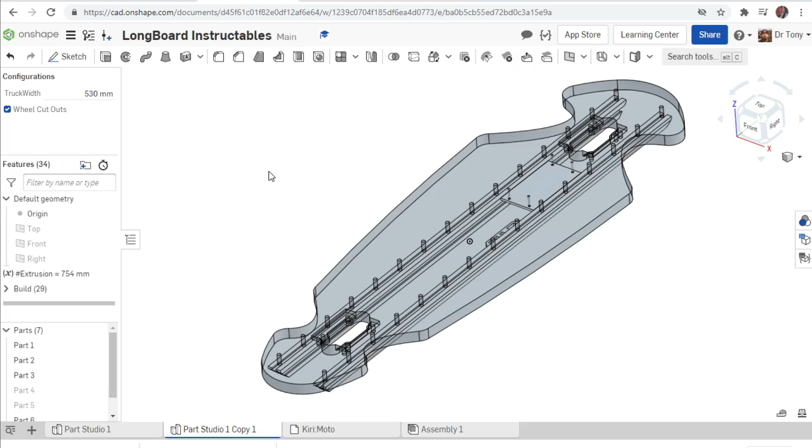In this video, I'm going to show you how to either laser cut this or mill this out. So first thing we have to do is actually pick out an actual pattern that we want to cut, right? So this one's at 530 right now. The one I built is 800. Okay, 800 is a little longer, kind of extra long. An average size might be like 650. Okay, that's gonna actually look like a regular longboard here.

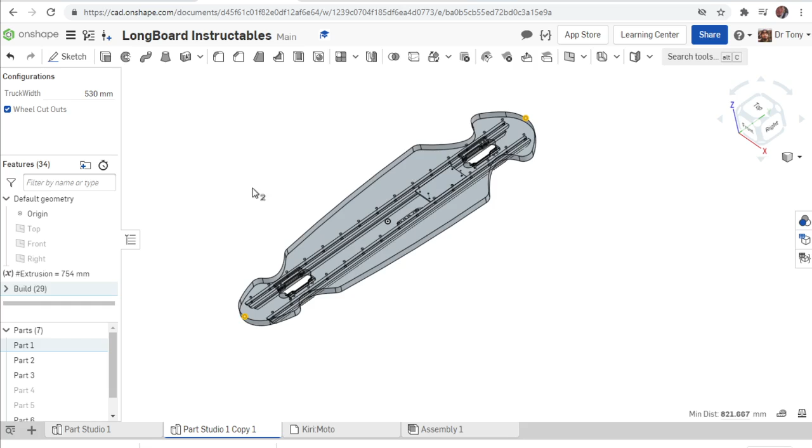Now I chose 530 because it fits on the Shapeoko 3XL, kind of a popular CNC milling machine. So if I were to click this point to this point, it's 821 millimeters. Okay, so the Shapeoko is 33 inches, which is 838 millimeters. So it will just barely fit on that. It'll fit just fine. It'll just have a little bit of extra room there. Okay, so we're going to take this 530 and show you how to play with that.

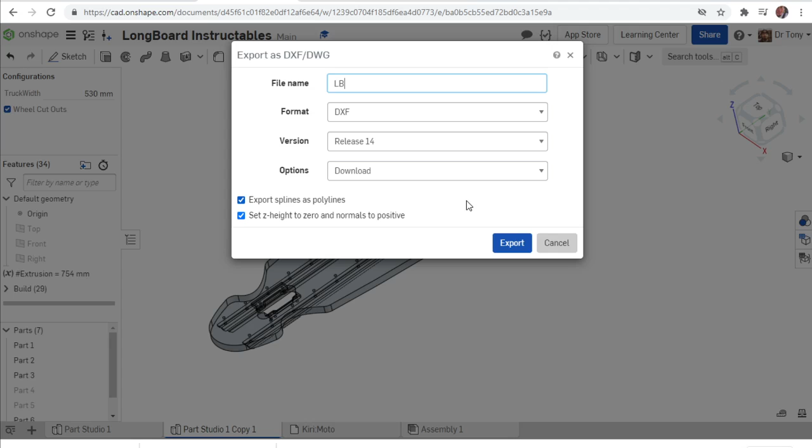So what I can do here is I can either take this to the laser or I can take it to the mill. So I'm going to start with the laser here. So I'm going to right click, export as a DXF, right? And then I'll call it LB 530 with cutouts. So that means it's a longboard, 530 millimeters, and it's got the cutout options. Okay. So then I can go over to Lightburn here, or whatever laser program you have, and bring that DXF in there. So here's a DXF,

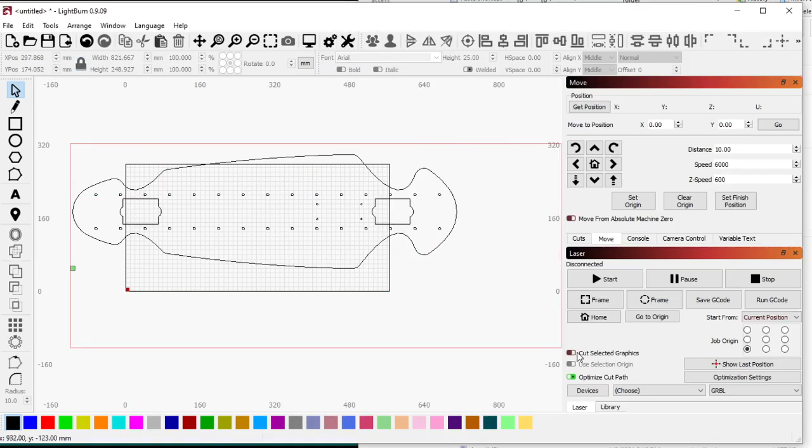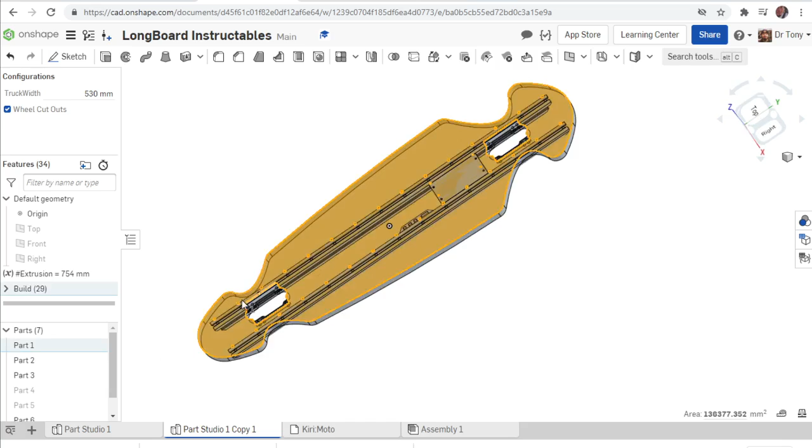and there we go. Now there's something wrong with this right here. Okay. So this one doesn't have the wheel mounts for this. So I'll show you how to fix that real fast here. That's my bad, actually. So delete this. Let's go back to our design here. So up top, this is the surface we're cutting out, right? Which is missing all this stuff in here. But if you pull from the bottom, right click, export as DXF. So LB 530 with cutouts for wheels. Okay. Call that good.

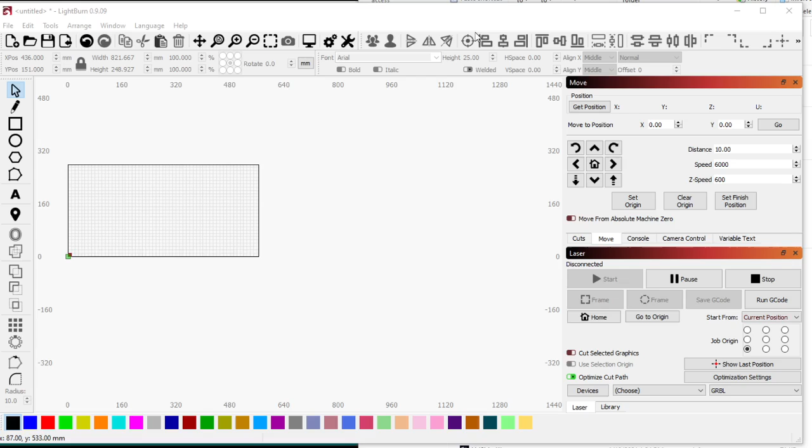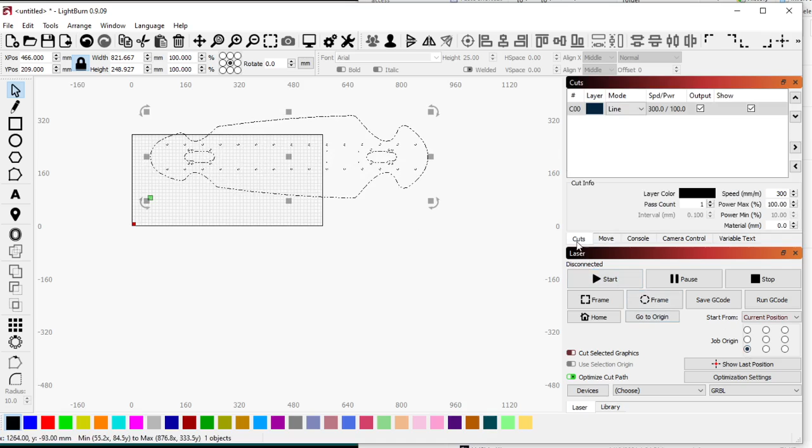And then we're going to go back to Lightburn here, open up our downloads, and drag that in. All right. Now we got wheel mounts or truck mounts. Okay. So with that, now we just line it up. Okay, I'm going to group this together. Let's see, cut from the bottom here. Let's go to our cuts. So I can either cut this out of wood or acrylic on my laser and call it good.

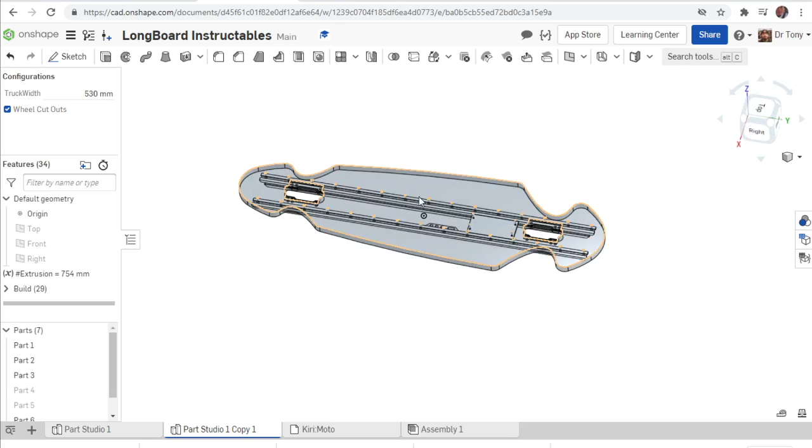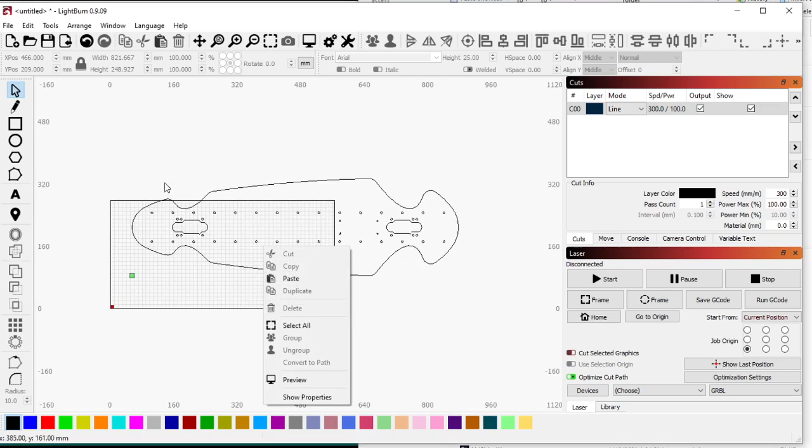I could also cut it out of a cheap wood and follow it with a router bit. Like, I can cut this out of 1/8 inch birch. And then screw it in with these holes. I could screw it into a piece of polycarbonate, piece of thick wood, whatever, and then use one of these reverse bearing tools and just follow it with a router, route it out manually. Or I could just laser cut it out of thick acrylic or thick wood and start mounting things. Okay, so that's the laser process, right?

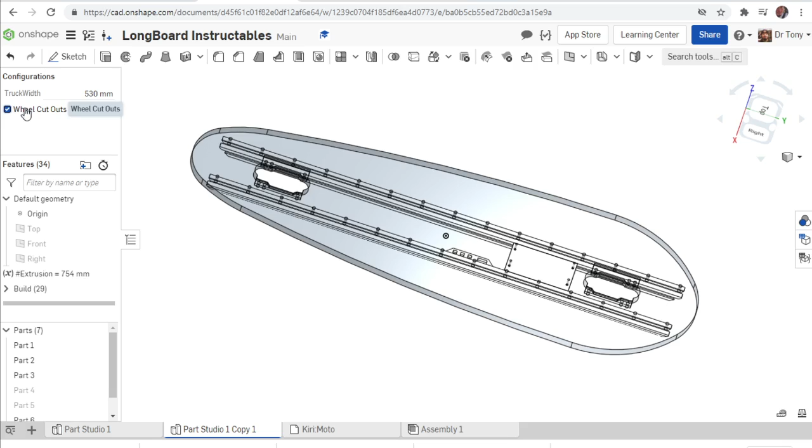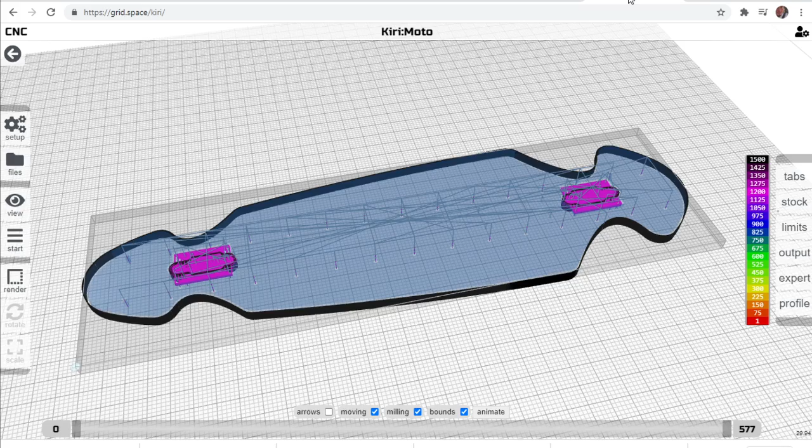The other way to make this thing is to mill it out on a CNC mill. Okay, so how to do that is, you get your size, you get your cutouts or not, if you want cutouts or no cutouts. I'm going to right click and just hit export. Not export as DXF, just plain export. And I'll call this LB 350 with cutouts. I guess it's 530. My bad. Sticking to it. Okay, then we go to Kiri:Moto here. Oh, I guess I already did this. Let's go to arrange. Delete this.

Okay. So, one of the coolest websites out there, you go to grid.space/kiri. You don't need an account. You don't need to have ever used it or signed up for it at all. And it might take a little while to load the first time, so be patient with it. What we're going to do is we're not going to be lasering, we're not going to be 3D printing, we're not going to be resin printing. We're going to be CNC milling. So I'm going to click on the CNC here.

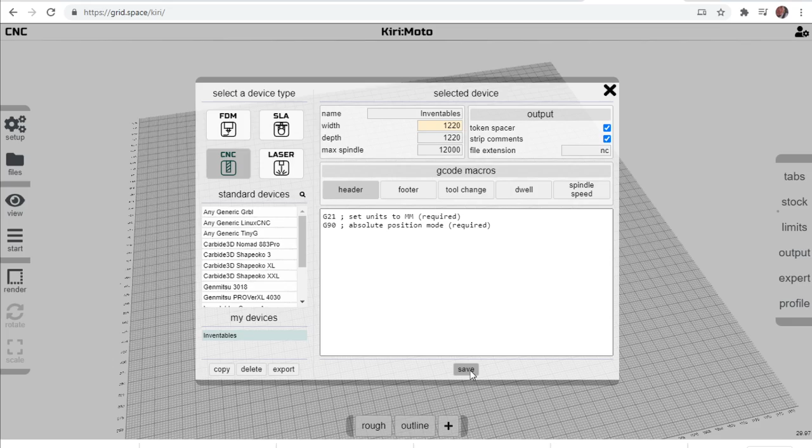Now you might have one of these CNCs already. The one we have downstairs, this is the size for it, so I'm going to leave it here and hit save. Okay, one more thing I'm going to add. So tools. I have a 3/16 inch tool. So I called it my end mill 3/16. The type is an end, right? You give it a tool number if you want.

Shaft diameter, length, right? And then the flute diameter. This is the important part. And the length of the flute, right? So this is where it's 3/16, 0.1875. And then I hit save, and now it's saved in my tool lists.

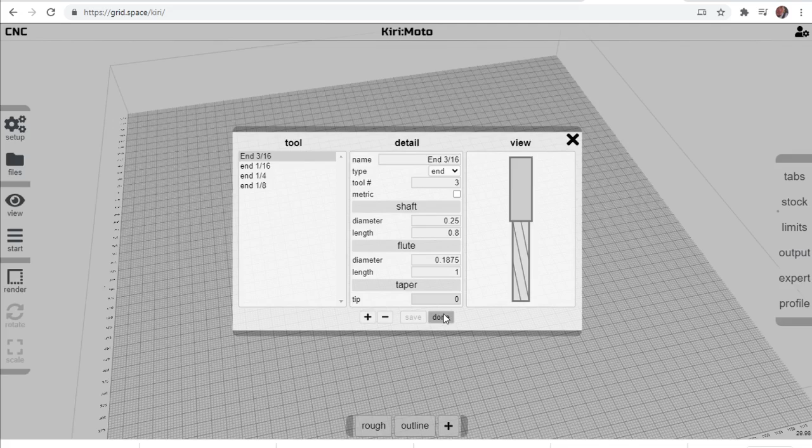Okay? So I got my machine set up. I got my tool set up. Now you don't need to use a 3/16. You can use a 1/8 bit if you want, but it's just going to take longer. Okay, so what I'm going to do is import, and we're going to go to LB350, right? Instead of 530, my bad. With this STL file. And there it is. There's our longboard.

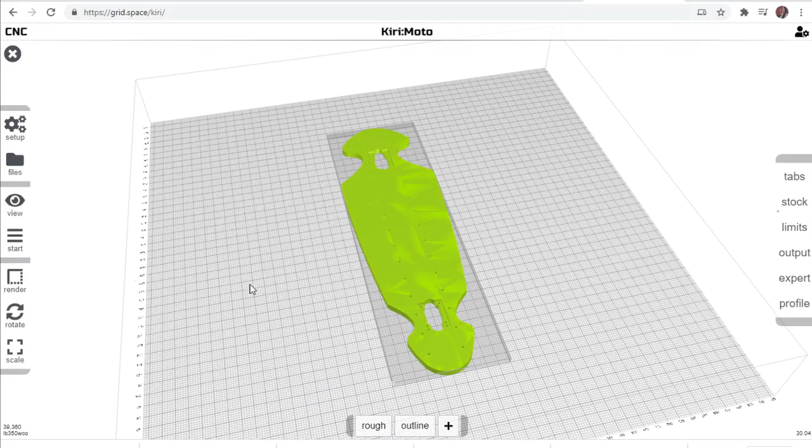I'm going to rotate mine, though. There we go. Okay. And then, let's see, what do we need to do? So we need to add, I guess, let's see, delete these, start from scratch here. Okay. So we need to add some programs, some process, some paths to this, right? So plus, and I want to add a rough. I want to rough out all these centerpieces here, okay? And all the holes. So I'm going to use an end 3/16 end mill.

Right, 0.85 is fine for my step over. That's a fine step down, 1.5 millimeters. 1200 millimeters a minute is perfect. Okay, and leave zero stock, right? Don't leave anything. Like, just call the roughing good. Right? And we're going to clear the void. So this is a void right here, right? We're going to clear it out.

I could just outline it to get rid of it, but sometimes the mill catches it and it'll break the mill. It'll shoot out the part. I'm just going to clear it all out. Doesn't take much longer to clear it. It's a little safer too. Makes it a little more of a mess, but it's safer that way.

I don't want to clear the faces, so I don't want it to like go over the top and clear everything off either. Let's see. Don't want to clear the top. I guess faces would be the edges here. But yeah, don't want to clear the top, and I want to do inside only. The outside will be a different function here. So starts with roughing, right?

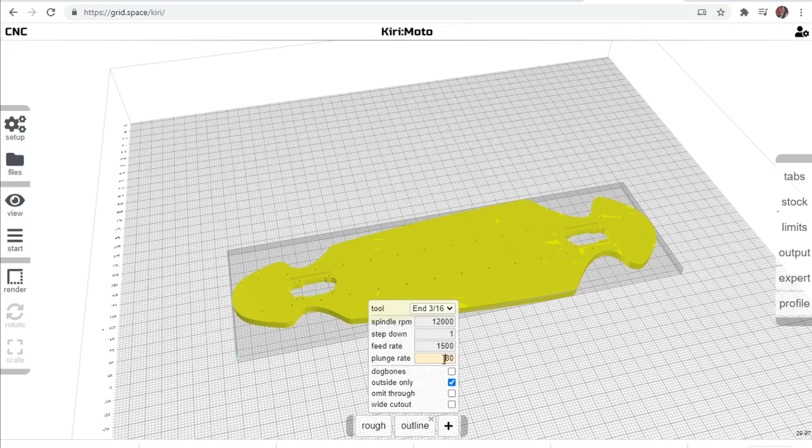And then we'll go to the plus here, and we'll hit outline. Okay, outline, 3/16 inch tool. Step downs 1 millimeter at a time because it has to do a full tool width every time it cuts. I can go a little faster though because it's not as deep. I like to plunge nice and slow, and I'm going to do outside only. Okay, so let's take a look at what this is going to look like.

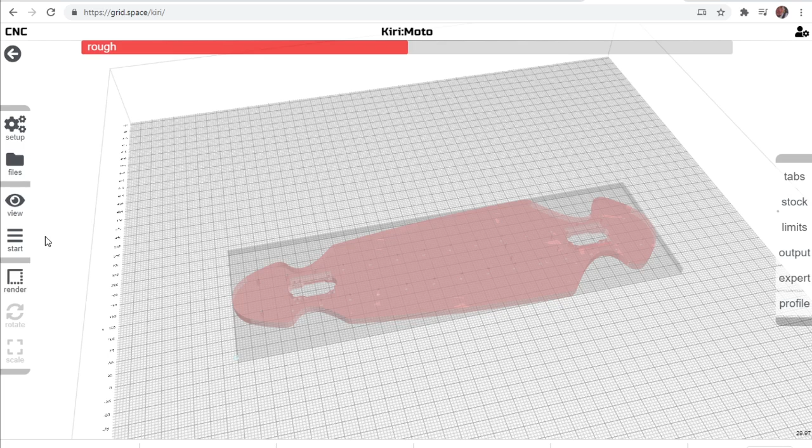Okay, so went to set up my machine, my tool. I hit the plus a few times, added a couple processes here. Okay, now I'm going to go to start and hit preview. And it's going to start slicing it and figuring out tool paths. Really, Kiri:Moto is just a slicer, but it has a laser cut function built in. It has 3D printer functions built in. It has milling functions built in. But Kiri:Moto in its core program is a slicer.

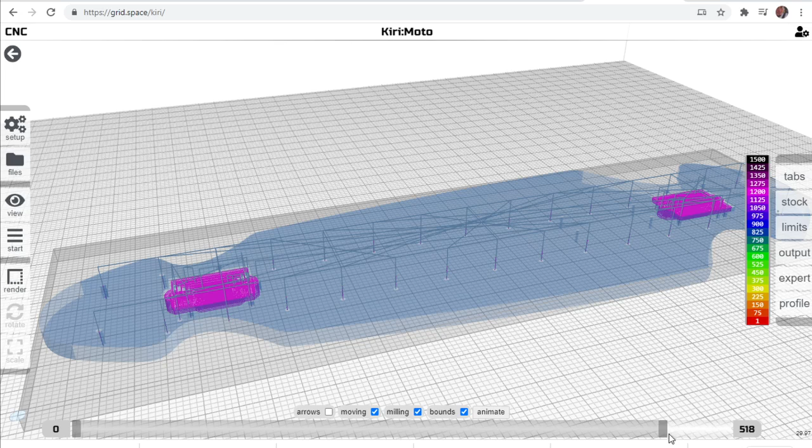Okay, so it looks like we actually have everything in there, right? So let's drag our progress bar. So it starts over there, grabbing all these little holes in some weird order, whatever. Okay. Oh, then it starts digging that out, right? Digging all that. Then it starts digging the one on the right. And then it starts doing the outlines. There we go. Cool. And that's exactly what we need. So now we go to start and export.

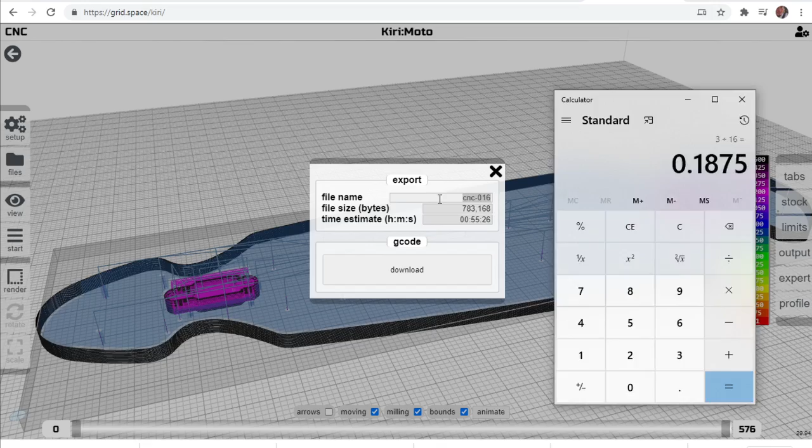And I'm going to call this, let's see, what do we use? 3/16. So, oh man, I forget what it's called there. Okay. 3 divided by 16 is 0.1875. Okay. So, whoops. Okay, go back to export. So this is an LB longboard 530 with cutout 1875. Okay, and download.

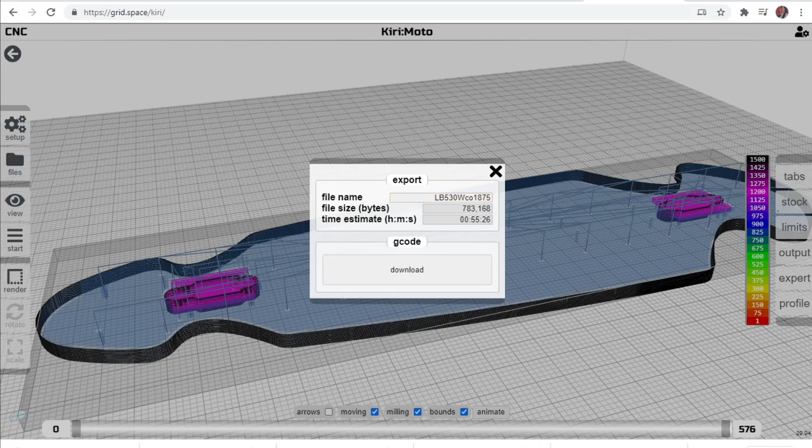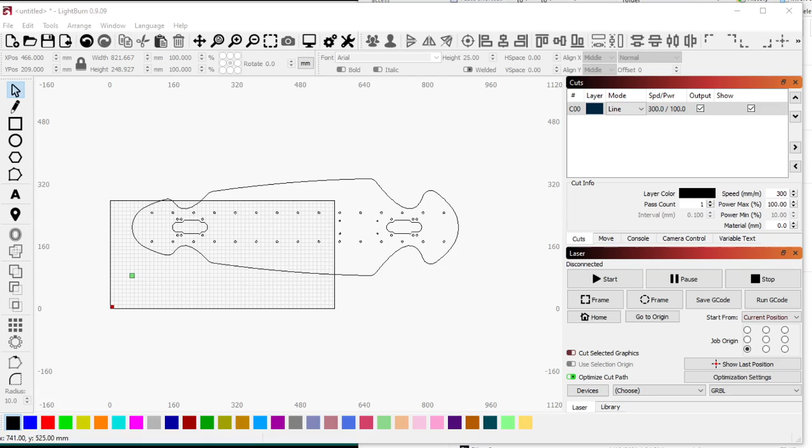Cool. Well, depending on your machine, right? You might have different accelerations and stuff. But according to my math, it's going to take about 41 minutes. So that's how to CNC mill it, how we laser cut it, right? Hopefully this gets you that flat piece.